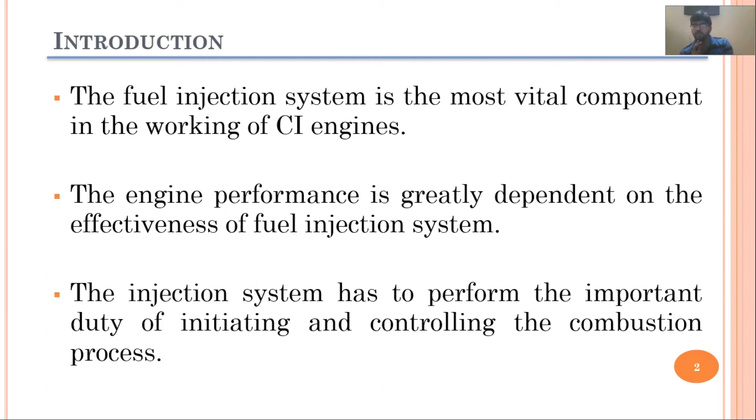In the last recorded video lecture, we started the new topic of injection systems, mechanical injection systems. We did a brief introduction on the purpose and why mechanical injection systems are required in CI engines. Then we discussed that in SI engines we have a carburetor which prepares the air fuel mixture and sends it into the combustion chamber for combustion.

But in fuel injection systems, we do not have a carburetor, and we are not sending air fuel mixture into the combustion chamber. Rather, we only enter the air, and air is being compressed. Then at the end of the compression stroke, we inject the fuel with the help of the fuel injection system.

Then we discussed some differences between the carburetor and fuel injector system: in a carburetor, air speed is greater, which takes the fuel from the float chamber and also atomizes it, making a homogeneous air fuel mixture. But in fuel injectors, fuel speed is greater than air speed at the point of delivery, and that is why the fuel is atomized.

Similarly, we discussed that in carburetors, air velocity is responsible for the amount of fuel taken from the float chamber to the combustion chamber. When the air speed is greater, or the pressure drop referred as carburetor depression is greater, a larger amount of fuel is taken in and sent to the combustion chamber.

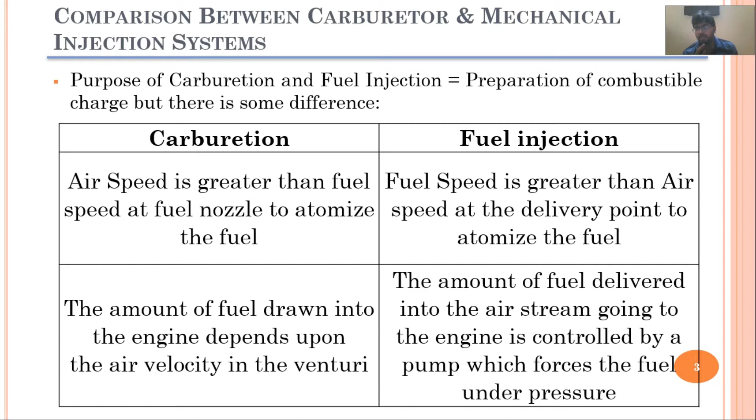Then we studied some of the functional requirements of the injector system, which were: accurate metering, timely injection of the fuel, proper control of rate of injection, and atomization.

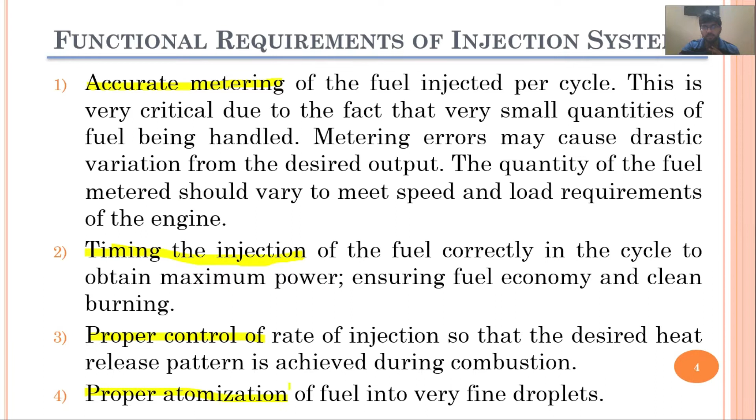The fifth one was proper spray pattern. I explained earlier that if the spray patterns are not uniformly distributed, you will not have an air fuel mixture close to homogeneous. So we must have a proper spray pattern. For example, with two combustion chambers having different spray patterns, in the second one a larger surface area is covered, giving it more tendency to form a mixture closer to homogeneous compared to the first arrangement.

Then we discussed the uniform distribution of droplets, which I explained by drawing two different combustion chambers with different spray patterns.

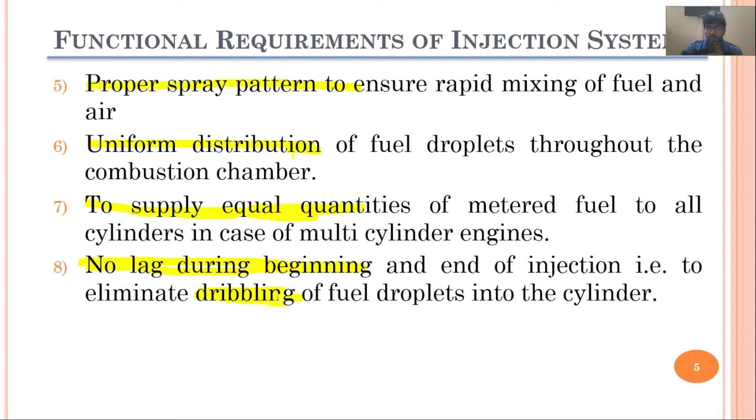It also has to ensure that an equal amount of fuel is supplied in a multi-cylinder engine. There should be no lag between the starting point and ending point of fuel injection, and it should not have any dribbling of the fuel, an effect I explained in the last video lecture.

Then we discussed the two main classifications of the injection system: the air injection system and the solid injection system. I mentioned in the last video that we will discuss the solid injection system in detail, and we will not study the air injection system in much detail because it is obsolete and not used nowadays.

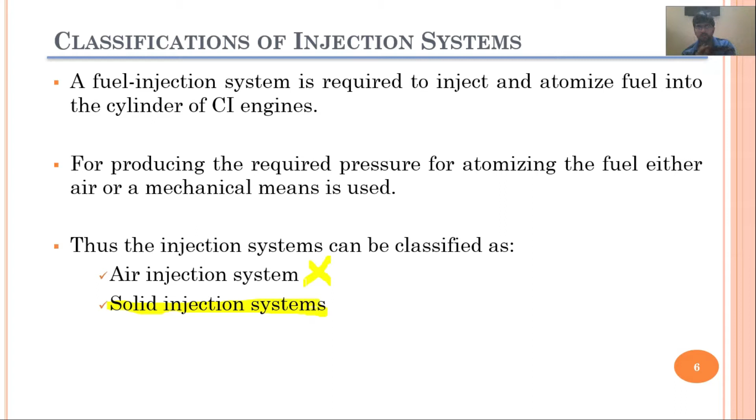Then we started off with a brief introduction of the air injection system. We discussed some advantages and disadvantages, concluding that because of the bulky size of their multi-stage compressors, these injection systems are obsolete nowadays, and mechanical injection systems are more commonly used.

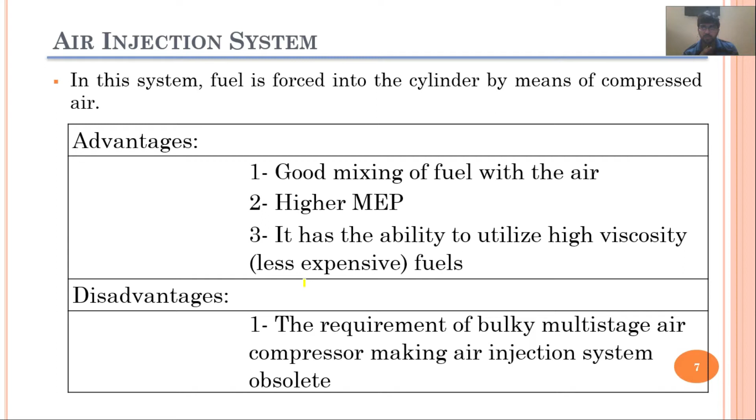Then we discussed that solid injection systems are sometimes referred to as airless mechanical injection systems, because air is not used in these systems for pressurizing the fuel.

Then I mentioned there are four different configurations used for solid injection systems, but I didn't discuss the details, and I told you in the last video lecture that I would explain these different arrangements in today's lecture. So we will start from here, from these four topics.

After that we studied the main components of the mechanical injection system, and concluded that we have six main components: fuel tank, fuel feed pump, injection pump, governor, mechanical injectors, and fuel filters.

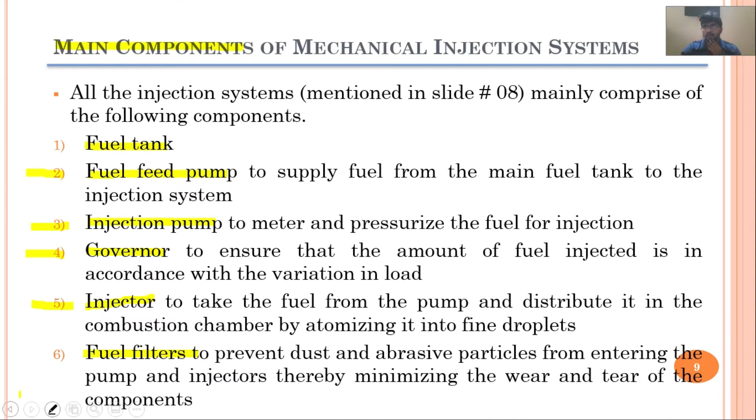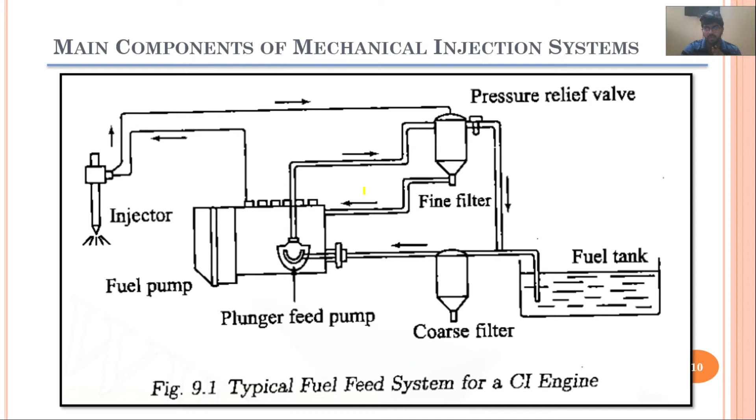I also explained that we will discuss these 4 components in quite some detail in this video lecture and the next. Then we moved towards the schematic of the mechanical injection system, the most common schematic diagram, and I explained this diagram in detail, and after that I explained the working of this mechanical injection system. So we ended our last video lecture at this point.

Today I will start explaining these 4 different arrangements. The first one is individual pump and nozzle systems.

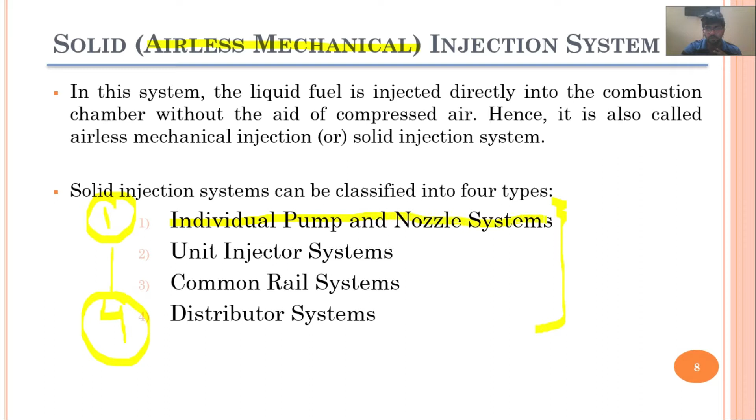I'm underlining it so that when I come to that part I will explain this. Now moving towards the next arrangement.

So in this unit injector system, as the name suggests, by unit we mean a single one. So we have a single housing which consists of a high pressure pump and the injector, and that housing would be placed on top of the cylinder, and the pump would be pressurizing the fuel to that extent that it will open the outlet valve of the injector and then it is injected into the combustion chamber.

So we can say that we have here, we not only have injectors, we also have the high pressure pump as well, in this complete housing. I hope this is clear now. So what is the difference between this and the first arrangement?

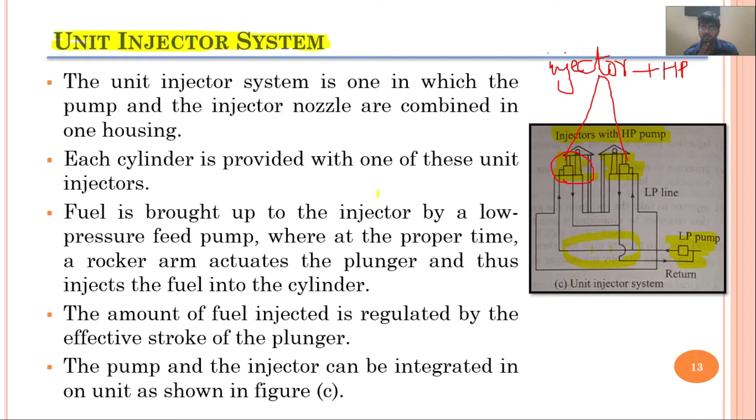In the first arrangement, the pump and the injectors are placed separately, and in the unit injector they are placed in a single housing, placed on top of the cylinder. So a unit injector system is one in which the pump and the injector nozzle are combined in one housing. Each cylinder is provided with one of these housings.

You can see we have two cylinders in this schematic, and we have two different housings, one each for the cylinder. Fuel is brought up to the injector by a low pressure feed pump, where at a proper time a rocker arm actuates the plunger and thus injects the fuel into the cylinder.

The low pressure pump takes the fuel to this housing, where the high pressure pump will pressurize it to that extent that it will open the outlet valve of the fuel injector, and then it is injected into the combustion chamber.

Here again, the amount of fuel injected is dependent on the effective stroke of the high pressure pump. I will explain this part later, as I mentioned earlier, in a later topic of this video tutorial.

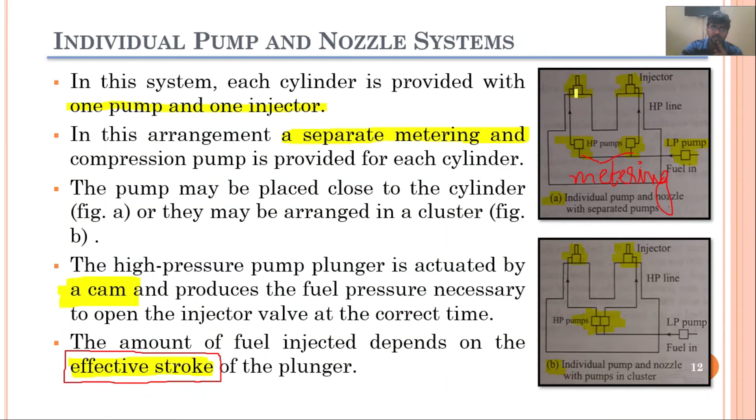The pump and injectors can be integrated in one unit as shown in figure C. I hope the difference between the two arrangements is quite clear now. In the individual pump and nozzle system we have a separate pump and injector, and in the unit injector system we have a single housing for the high pressure pump and fuel injector.

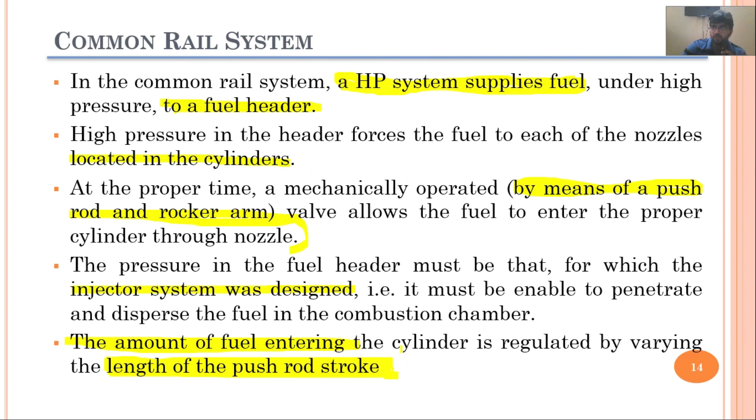The high pressure pump is used for supplying fuel to a header from where the fuel is metered by the injectors. This is what I was trying to explain, that in the previous two arrangements metering was done by the high pressure pump. In this arrangement the metering is done by the injectors only, not by the high pressure pump.

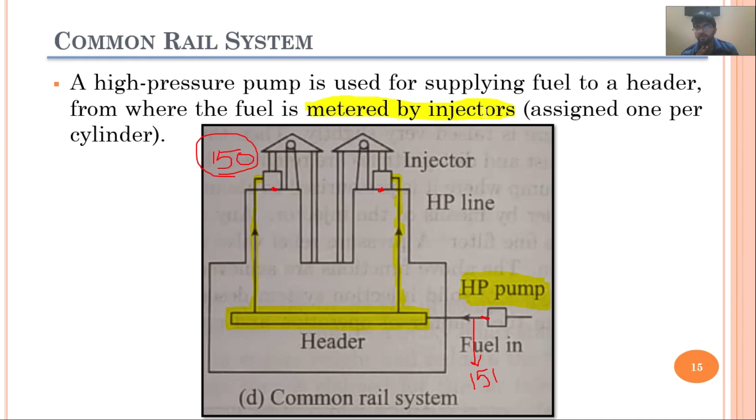Similarly, when this rotor is rotating, and it comes in alignment with this cylinder, now the injection time has started, and fuel will travel from here to this point where the fuel would be injected into the combustion chamber.

So this is how these distributor systems are operating. Fuel is just being pressurized by the high pressure pump. Then the distributor pump is responsible for supplying the fuel to each of the cylinders.

In this system, the pump which pressurizes the fuel is also metering, and not only metering but also timing it as well. The fuel pump, after metering the required amount of fuel, supplies it to the rotating distributor.

And when the correct time has arrived, that distributor will now supply the fuel to the fuel injectors. The pump has pressurized it and then supplied it to the distributor, and when that rotor comes - for example, this is your rotor rotating, and this is the outlet line from which the fuel will go to the injector. This is the passage from which the fuel will come, and it is rotating, and when it comes in alignment with this outlet passage, the fuel will pass to the injectors for fuel injection.

And when the rotor has passed through this point, no fuel would be supplied to that cylinder. And when it comes in alignment with the passage of the second cylinder, then the fuel would be sent to the second cylinder. I hope it is clear now.

The rotation of the rotor in the distributor system is basically responsible for supplying the fuel to the injectors. The pump is only pressurizing it and metering it. The number of injection strokes per cycle for the pump is equal to the number of cylinders.

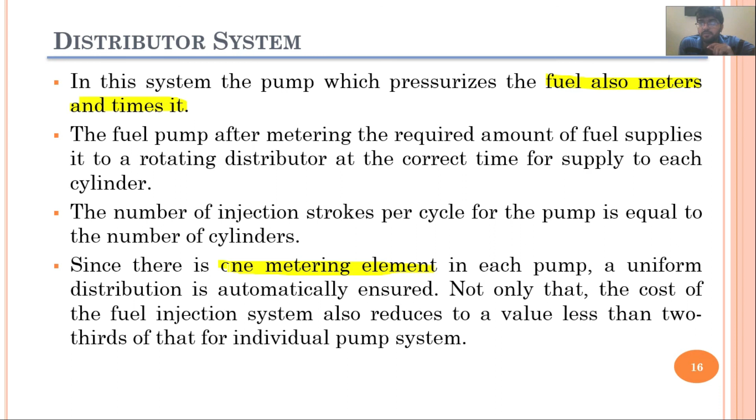But since we have only a single fuel injection pump in this arrangement, we can say that the same amount of fuel would be supplied to each of the cylinders. Not only that, since only a single fuel pump is being used, the cost of this system is also reduced, and they are quite simple as well. Their arrangement is not quite difficult since we have only one single pump.

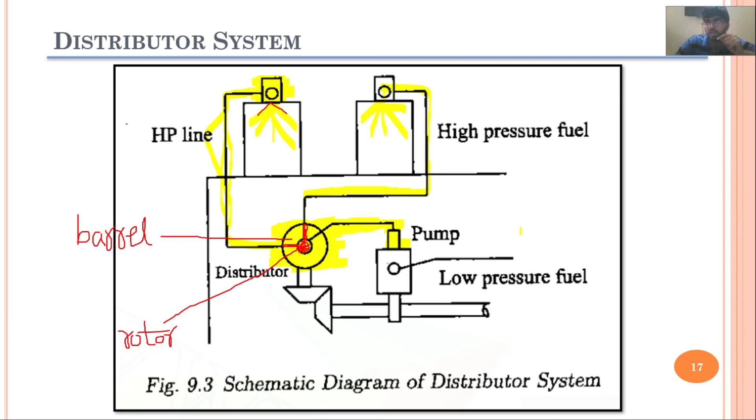So these arrangements are most commonly used in our IC engines, in our cars. Distributor systems are most commonly being used.